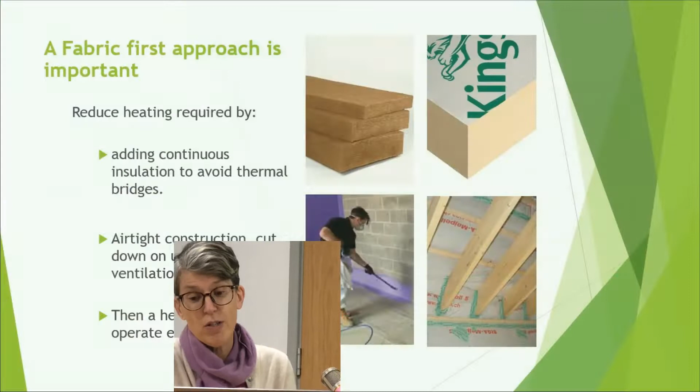Sorry, too much. Here you go.

So it's important to take a fabric first approach. You first of all reduce the heating required by adding continuous insulation to avoid thermal bridges. These are caused by gaps in the insulation or where the insulation is thinner, or materials such as steel or even timber crossing the insulation layer and conducting cold into the building.

And then airtight construction is important to cut down uncontrolled ventilation. The image shows two ways of doing this, using spray on, or you can tape to stop the gaps.

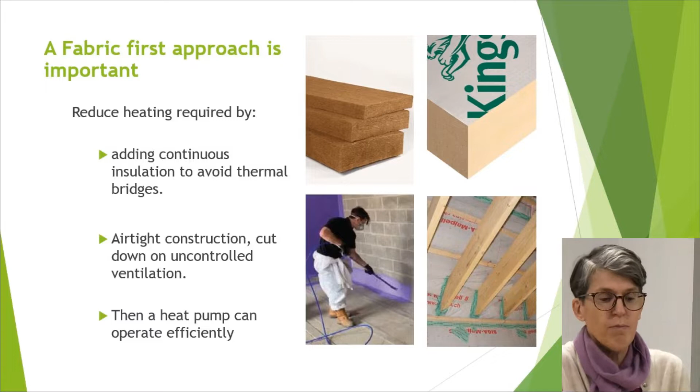So no insulation without ventilation. As uncontrolled ventilation is reduced, a suitable ventilation strategy is vital.

If your house is still a bit leaky, trickle vents and constant trickle extract in wet rooms only will boost - the boost is activated by humidity levels.

Or if you've achieved better air tightness, then a whole house system extracting stale air from every room can be centralised if there's space for ducting, or decentralised with kit in every room.

Trickle vents in windows or walls are still needed in this system, but they can be humidity activated as well, so they'll only pop open when required, instead of like a lot of trickle vents that we have in our homes, which are open all the time.

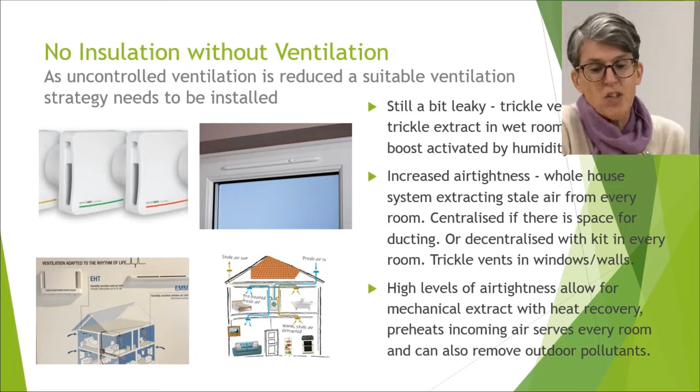If you can attain high levels of air tightness, then that allows for a mechanical extract with heat recovery. It preheats the incoming air and serves every room, and can also remove outdoor pollutants.

So, measures for roofs.

Options for rooms in the roof suffering from overheating and hard to heat in the winter. Insulation between and under the rafters can be installed, which can also provide damp-free storage space.

This is a cheap and easy option first: insulation between and over the ceiling joists to a level of nearly 300mm deep. You'll need boarding to prevent squashing the top layer if you're going to use it for storage.

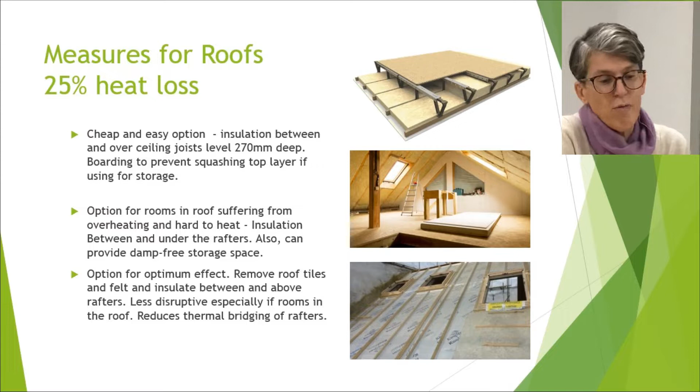Then there's the option in line with the rafters. For the optimum effect, remove the roof tiles and felt. This is great if you need to re-roof because your tiles are failing. This allows you to remove the tiles and insulate between and above the rafters. It's less disruptive, especially if there are rooms in the roof, and it reduces the thermal bridging of the rafters.

Measures for walls: cavity wall insulation. This is cheap and easy if the cavity is not too small, but it's very sensitive and not for areas of driving rain and wind without a high performance render coat. And we're in one of those areas with those sort of conditions.

Internal wall insulation - you can see wood fibre on this second image that's been installed on the walls. This is for houses that are listed or in conservation areas where they can't change the facade, or with decorative facades that you want to retain.

External wall insulation, shown in the last image, deals well with thermal bridges and has low internal disruption, although eaves, sills do need to be adapted, and external pipes need to be removed and then refixed.

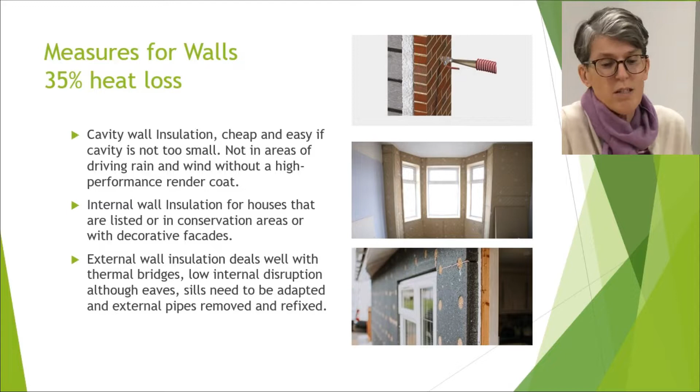Measures for windows: triple glazed windows and doors are much more readily available now, and this reduces cold radiance effect. Cold radiance from single and double glazed windows causes a downdraft, even if you've got an airtight house.

So they're worthwhile installing. Correct installation is key. The image shows a cover strip removed to show no cavity closer. It's not very clear up there, but it was just open to the cavity with just a piece of UPVC to stop the weather getting in.

Secondary glazing for period windows, but the windows do need to be draft proofed. All the dirt and debris blows in from outside and gets stuck between the two windows.

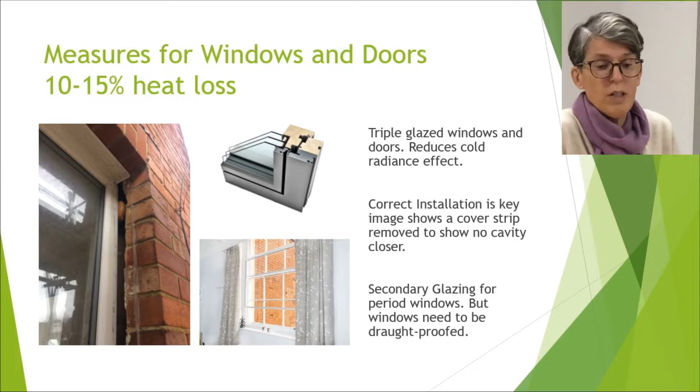Floor measures: insulating timber floors - suspended timber floors. The image shows rigid insulation cut to fit, but in this situation the airtight tape will not fill the gaps, it will just stop the air infiltration. Expanding foam is required to fill those gaps. Squashy insulation fits better. This image shows some wood fibre, or there's a Qbot, a little robot that you can pop into a hole in your floor and it will spray foam from below.

Insulating solid floors is more difficult. Floors have to be dug out and door openings adjusted, though I think Dave's got an example of that later on. Although very slim systems are available, and sometimes just cork flooring may suffice.

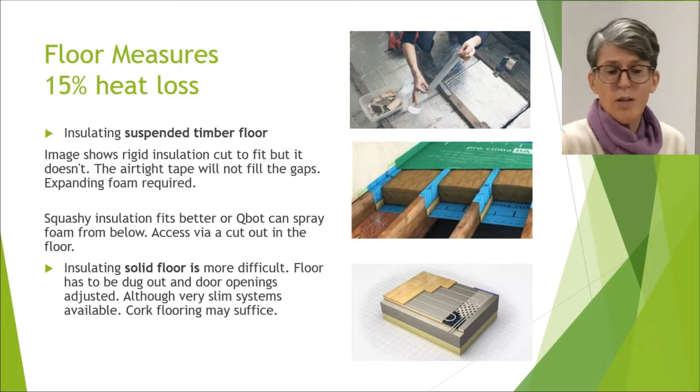Once you've dealt with the fabric and reduced your heating load, you can look at the heating system. Air source heat pumps are the most popular at the moment, and there are grants available - 270% efficient compared with a gas boiler that is at best, brand new, 98% efficient. It goes well with underfloor heating, or larger radiators can be installed to suit the low heating temperatures of 35 to 45 degrees. Other options like ground or water source heat pumps if you have a stream, river or lake nearby.

Funding from the Renewable Heat Incentive, payments over 7 years, is to be replaced with a less generous clean heat grant in April. But there is also the government grant of 5,000 over the next 3 years. Heat pumps will be the option for the next 10 years - hydrogen is not really viable yet.

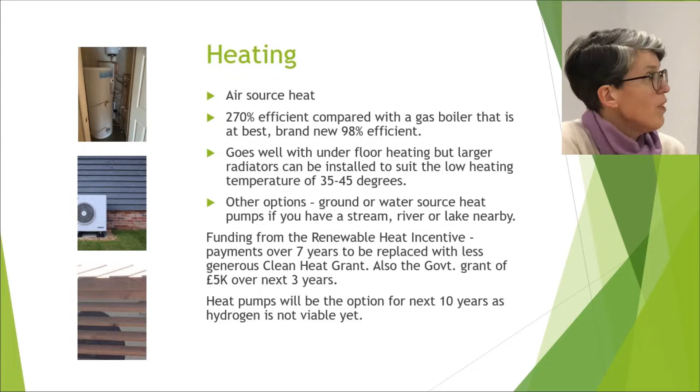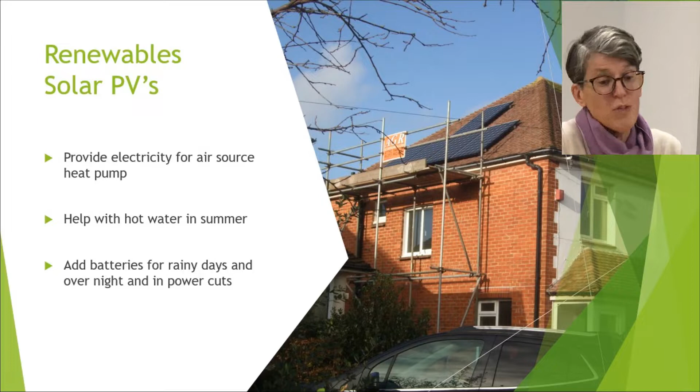And then if you've got any money left over, you can attach solar PVs. These can provide electricity for the air source heat pump, which is an ideal match for them. It can help with hot water in the summer when the air source heat pump doesn't do so well. And you can add batteries for rainy days, overnight, and for power cuts.

So what are the easy wins, the things that are less expensive that you can all do now? LED low energy light bulbs, payback in 9 months, and there's more interesting models on the market now. Ceiling level loft insulation, as mentioned before. Draught proofing doors and windows is an excellent way, a cheap option, and a DIY job.

Then polycarbonate and magnetic tapes for secondary glazing has been used, very useful for large historic windows. Sashes especially are hugely expensive to replace.

And there's water saving devices. You can fit regulators or aerators to taps and showers. And there's a wastewater heat recovery system now which is effective, it takes heat from the bath and shower water.

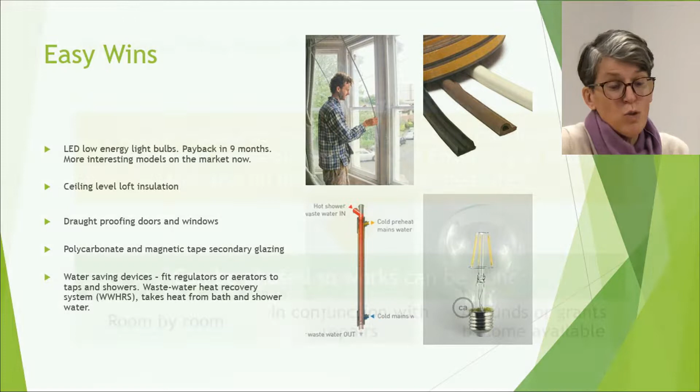So what you need to start with is the essential whole house plan. Single measures installed in isolation can lead to unintended consequences. A whole house plan ensures you avoid this and do not block future measures. It can be phased, so work can be done room by room in conjunction with repairs, or as funds or grants become available.

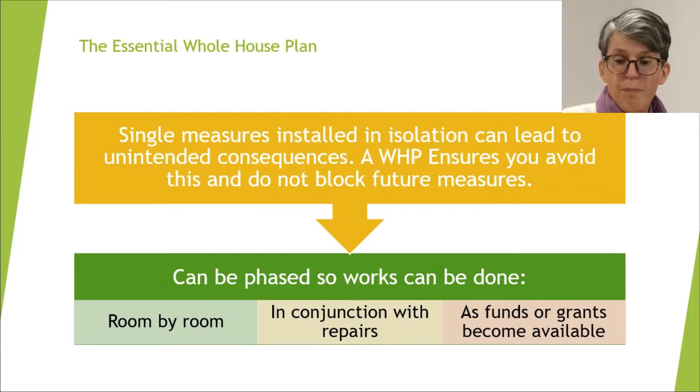Because retrofitting involves a careful balancing of different elements and their effects on the overall performance of the building, a change in one part can affect another, and sometimes this is only apparent after irreversible defects have occurred. It's very important that risks are understood and managed in a way appropriate to each individual project. Standard solutions should not simply be rolled out without proper consideration. It's vital that care is taken to ensure high quality installations.

So where to start and who can help? Try the Plan Builder on the Warmer Sussex website to get an idea of what measures will suit your home. And you can contact a retrofit coordinator who will identify, assess and manage the technical and process risks commonly associated with domestic retrofit projects.

Costs and funding. So like buying a car, retrofit does not work if simple payback is considered. There are more green mortgages on the market which give low interest or cash back if you are doing retrofits. They will lend money for that purpose.

Sometimes downsizing and using that money from downsizing, you can fix lower energy bills for your retirement. I met one client who had a large house they didn't want to move out of, so they were going to turn the upper floors into a separate flat and just live in the lower floors. That was their solution for funding the project.

Many of the techniques, as Sarah's discussed. We've developed our own techniques over the years, and we're hoping they're going to become quite a standard, almost like what you'd call a typical detail. So this is one we do a lot, where we remove all the plaster and...

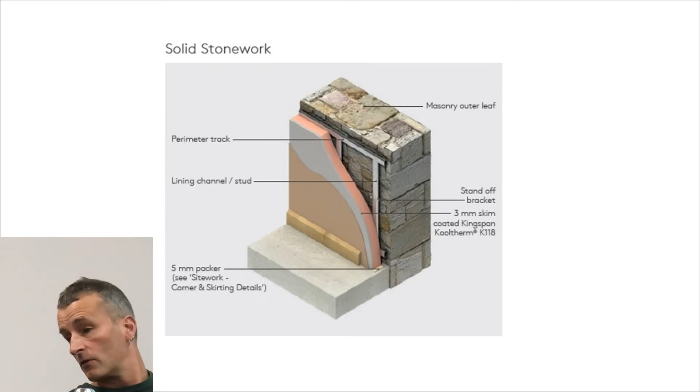So yeah, that's the drawing I found on the internet. So there's - if you can go on. Do you want to, I think you can, just click on there. There you go.

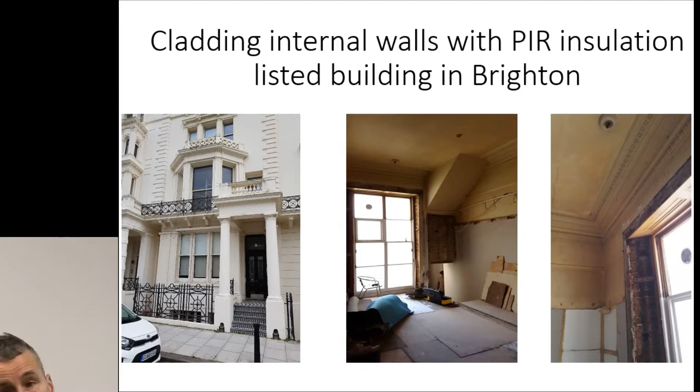So this is a listed building we did in Palmeira Square a few years ago, and it's the flat up there that you can see. When they bought the flat, they thought the ceilings were about 2.5 metres high, but they found up above them was a whole 2 more metres - there's massive rooms.

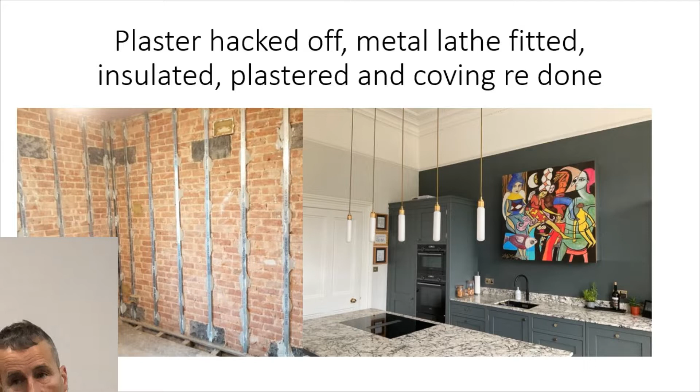And in working with English Heritage and stuff, we removed loads of the mouldings and insulated behind it, then put it all back. It is expensive though, there's just no two ways about it. But then having properties like this - so how do I move on?

Just click the padding there. You should just - what's that there? Yeah.

So that shows the walls stripped, and then it has the metal lath on it. It's called MF10, and then that's the room finished. So yeah, it is a lot of effort, but I think it's the only way, otherwise you then have the property that's not warm enough and not efficient. And yeah, there you go.

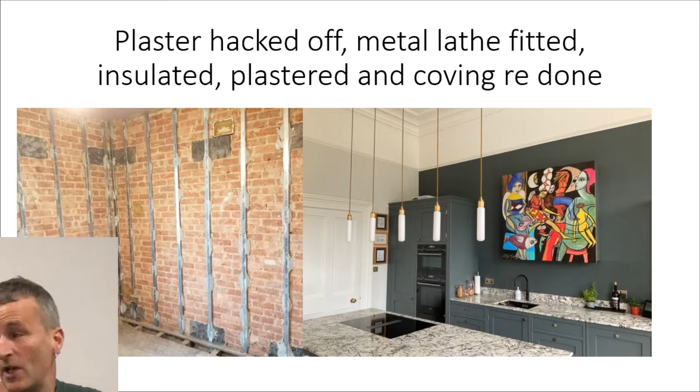It's a huge room as well, isn't it? That's a massive one, that's just part of it. So again, this is another property in Brighton.

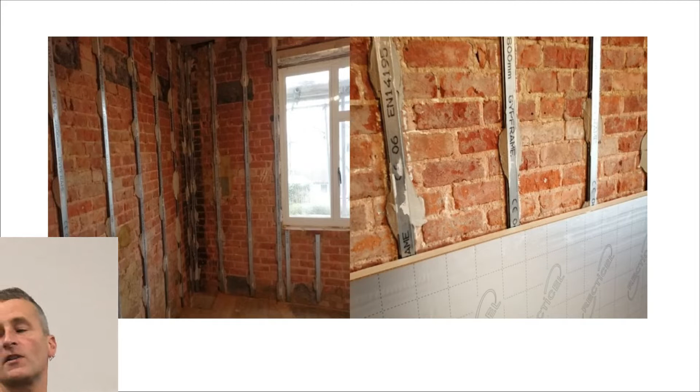This is a 1920s house, and again you can see the walls stripped with the MF10 system on it. This we did with Solesco - so that's 40 millimetres of it there. We put that on first and then we plasterboard over the top. That's a cheaper method because we're not using - in the previous one it had to be all lime mortars and stuff like that, which are very time-consuming and expensive. So, that is the rooms finished in that one.

Another technique we use is to try and create a thermal block in the middle of a house, normally on the ground floor. A really good way of doing that is having a very well insulated slab with concrete or screed in it.

If people have solar panels, part of the problem is creating energy when you don't need it. It can get fed back into the main system, people can have it in batteries, or you can stick it in your car if you've got an EV vehicle, or it heats a big lump of concrete, a thermal mass in the middle of the house.

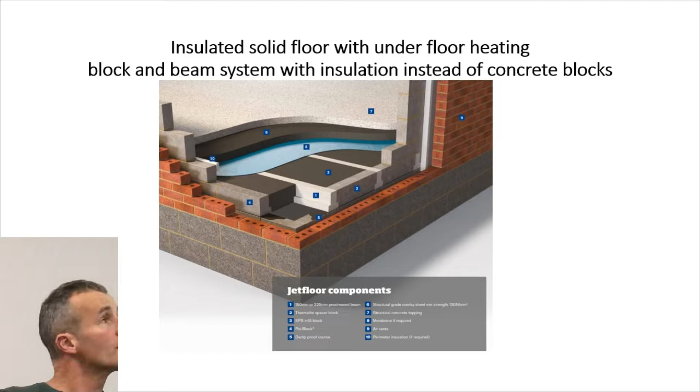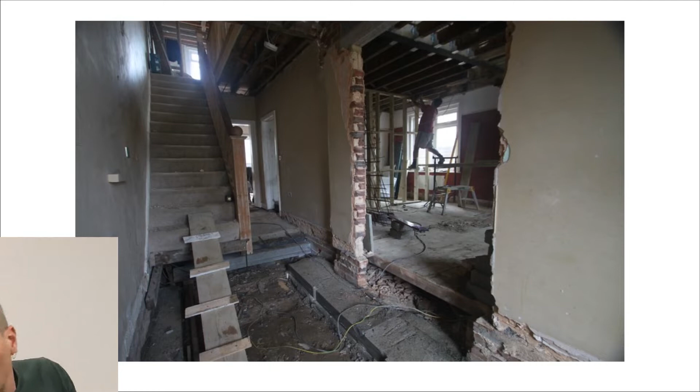We didn't have to dig it out particularly deep. There's normally a space like that under most buildings, modern ones anyway. And then that's it, showing it looking pretty. This is the system going in with the insulation in it, and then it has the screed on it. And then on the screed we put what's called a decoupling mat, because it's going to be tiled.

In that screed is a heating element. The decoupling mat stops the movement, because you get a level of expansion and contraction, and the tiles will crack or move. It's quite a newish thing to do, but it does work very well, especially over large areas.

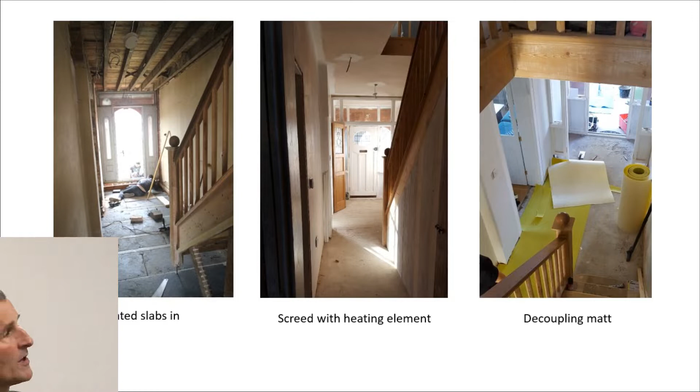It takes several days to get fully to temperature, but it takes days to cool down. Again, that just heats the core of the house. So in conjunction with PV, photovoltaic panels, on a sunny day in the winter, that energy will just go straight in there and store it. So yeah, so there's that.

There's a cooling core in the summer. How does that work? It's a bit like in continental houses, they'll have a marble floor, and in summer it just remains cool, because the ambient temperature is cooler overnight, and it's just this nice cool effect, which I think we're going to need more of, with these sort of hot summers and freezing winters.

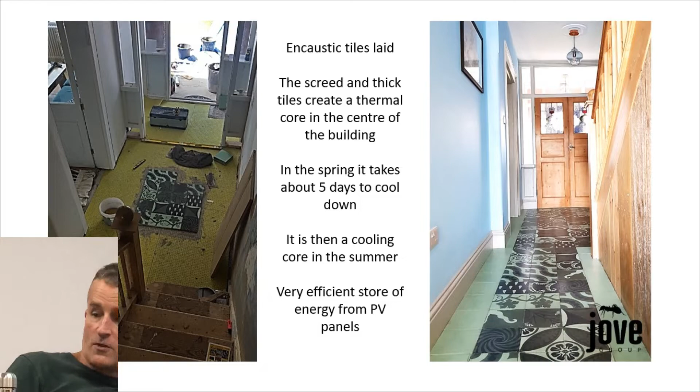So this technique is where you take up the floorboards, so it's a suspended floor, and between it we put a geotextile, the same stuff used to stop weeds growing through. It's draped in there and stapled, and then we fill it with either vermiculite, or there are other products like granular cellulose. You just pour this stuff in, and it's got a really good thermal index, and because it all just settles there and it's completely inert, it fills the gaps really well.

And then you finish the floor back over the top. It's technically very, very easy and very, very efficient. You've still got to have ventilation underneath, but it enables that.

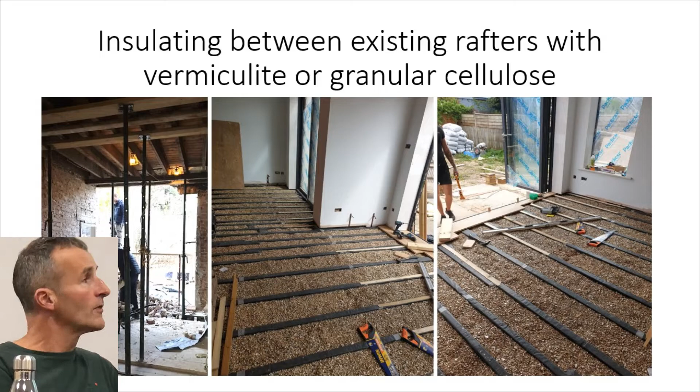It's worth treating the timbers beforehand, because modern timbers are pressure treated so they can put up with woodworm and stuff like that. But some people are concerned about this because of the lack of ventilation in the timber itself, which can encourage pests like woodworm - they like it warm with no air. So you just treat the timber first, and then that's the room done.

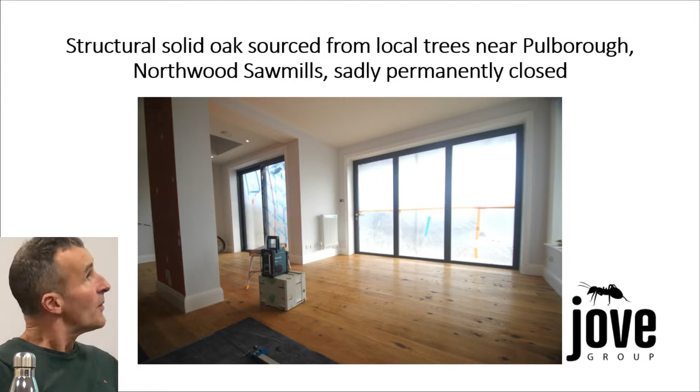With a structural oak floor, it's just interlocking solid oak stuff, which we used to get from Northwood Sawmills up the road, which closed last year. They would only get their oak from local trees - farmers would have a tree fall down, they'd call them up, drag it off and turn it into these lovely floors, and it was really cheap, with a very good carbon footprint on that.

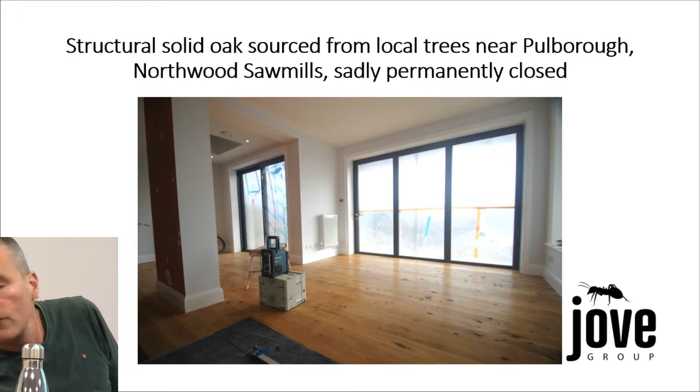And I think, yeah, that's all I've got. So there you go, thank you.

The depth that you've got there - so you've insulated the void underneath, and you've got a depth of what? The block and beam floor? Yeah, the beams come in two different sizes depending on what the span is, one 150 mil and 225. And then the thinnest screed you can have, conventional one, is about 70, 80 millimetres.

So you need the insulation as well, so you do need a fair depth. Really you'd need a dig out of about 400 mil, so that there's a bit of air gets in underneath. But it's actually a simple system to do as well - there's nothing particularly difficult about it. You just get these beams, plonk them in, very lightweight.

The sections that sit in between are like a T shape, you just cut them with a kitchen knife. You've got insulation within the beams, then on top of it if you want to, and that gives you a very good U value. Then you can either concrete or screed on that, and that's where you'd put the heating element. The reason that one took so long to heat up is because the heating element's right in the bottom, and it is to heat this big lump.